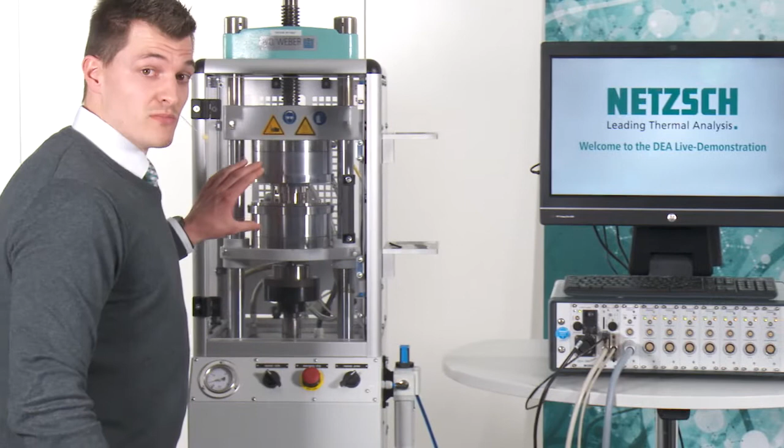This is our NETZSCH DEA 288 dielectric analyzer. Here you can see we have one sensor plugged in channel 1. We use this type of sensor here. It's a tool-mountable sensor. The big advantage of the sensor is that we are not only recording the dielectric signal, so the curing behavior of this material, we also have a thermocouple integrated inside, so we can also follow the exothermal heat of this material during cure. This sensor is integrated into the mold of this DEA lab press you can see here inside.

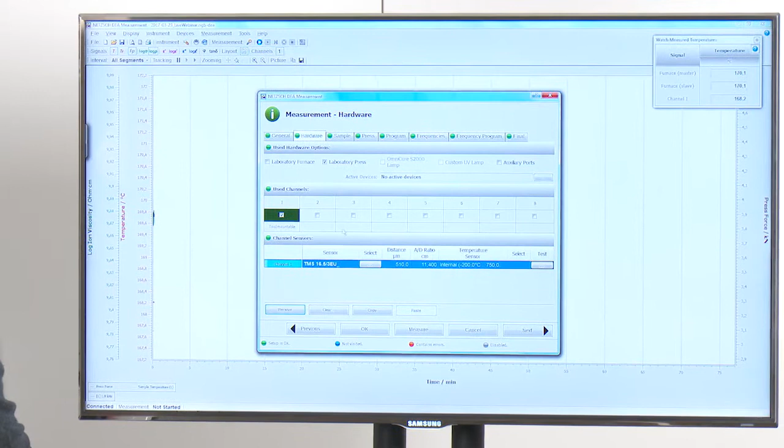So we're ready to start. I will show you how easy it is to use the NETZSCH Proteus software to start a dielectric measurement, and then we'll have a look at the curing behavior of this material. So you have just to put in a few things for sample preparation. Here we have to use our DEA lab press. We have to put on the DEA lab press as a hardware device, and we use the tool-mountable sensor with the integrated thermocouple inside. Maybe, Alex, if I come in, I can also show you that here, this is TMS. This is where you decide in the software.

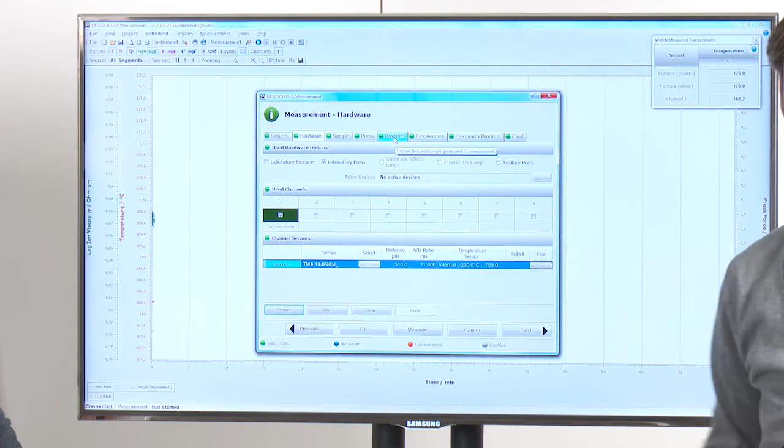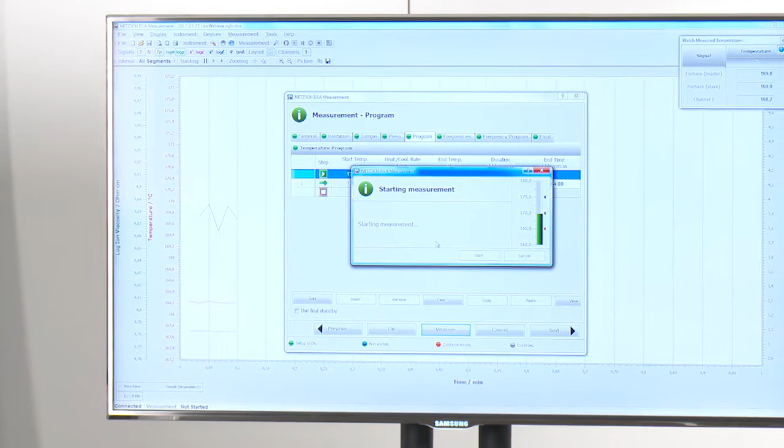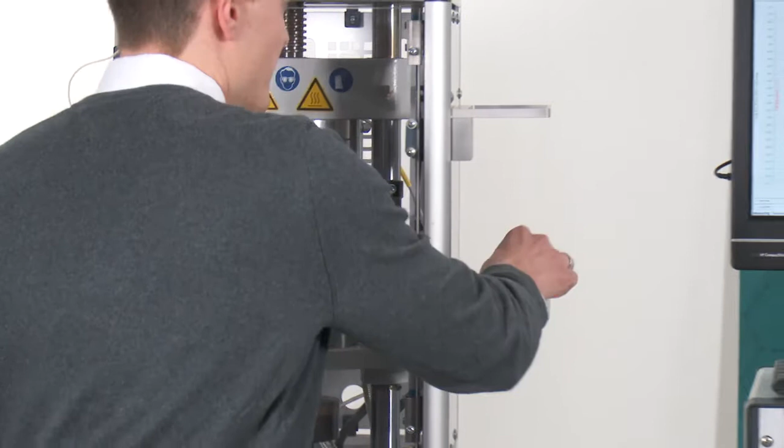Yeah. As a temperature profile, we do an isothermal cure at 170 degrees Celsius for about 4 minutes to follow the curing behavior of this material. So now we are ready to start. I will start the measurement, then we will see how I put the sample into the mold of the press, and we will follow the signal of this material. So now I'm using this carbon fiber prepreg material. Open the door, put the material into the mold, close the door, and we will have a look at what is happening now. Okay, we see that something is happening already.

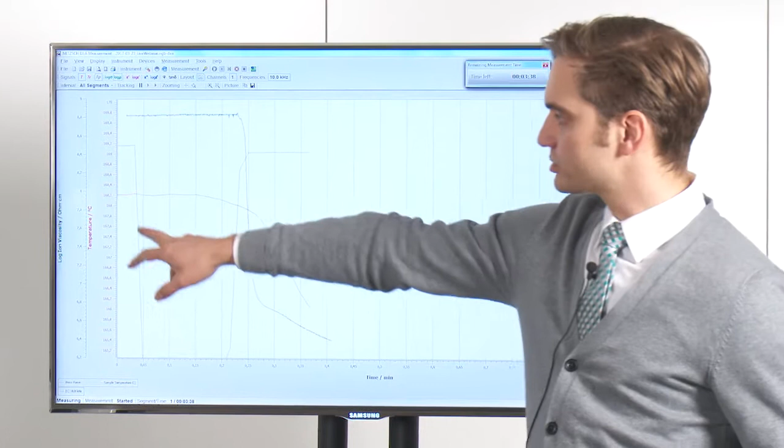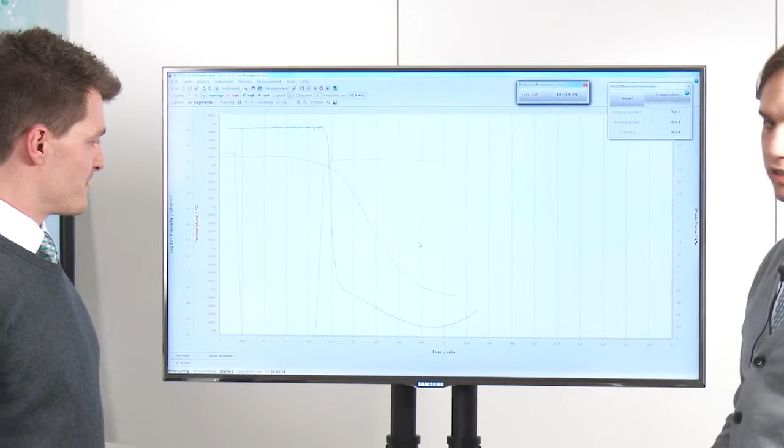We have a look at this green signal here. Well, you see the green curve. This is nothing else but the dielectric signal. Also, we see a red curve here that is tracing the temperature as it occurs. Yeah. Alex, just tell us what is happening with the DEA here. What can the DEA show us? What you can see here is a very sharp decrease in ion viscosity. This indicates that the sample has just arrived at the sensor surface.

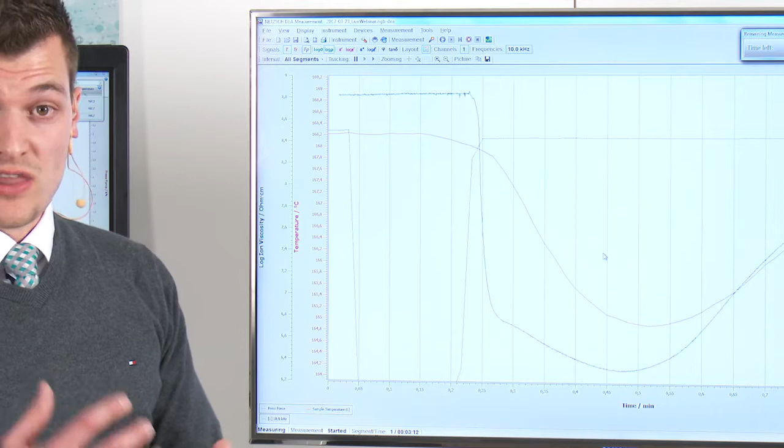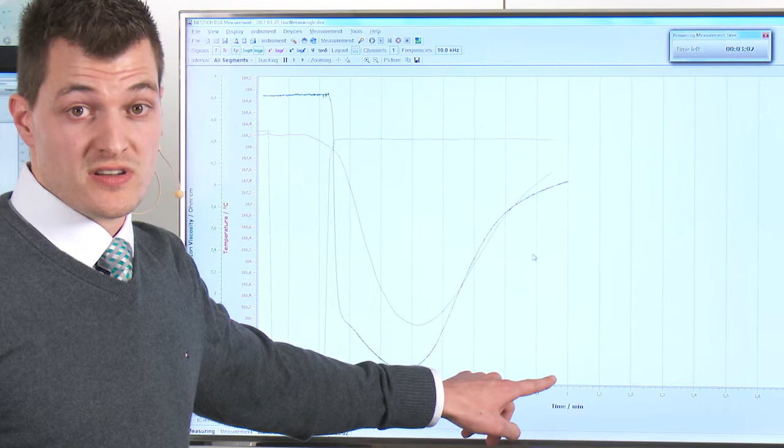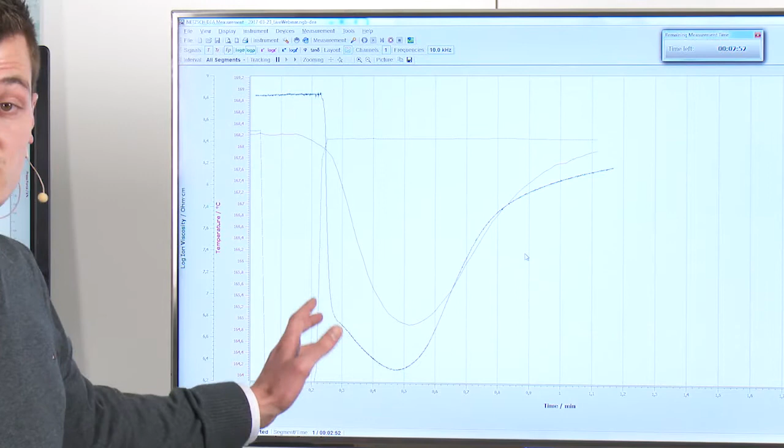Then you can see a very sharp decrease that indicates that the material is getting lower viscous. So here you can see a minimum. This is the point where you've reached the lowest ion viscosity, which correlates to the state of lowest viscosity you know from rheology results. Now you can see that the ion viscosity is increasing and increasing. The slope of this increasing ion viscosity gives us information about the reactivity of this material. So the slope is directly correlating to the reactivity, so the speed of cure at each point we measure here.

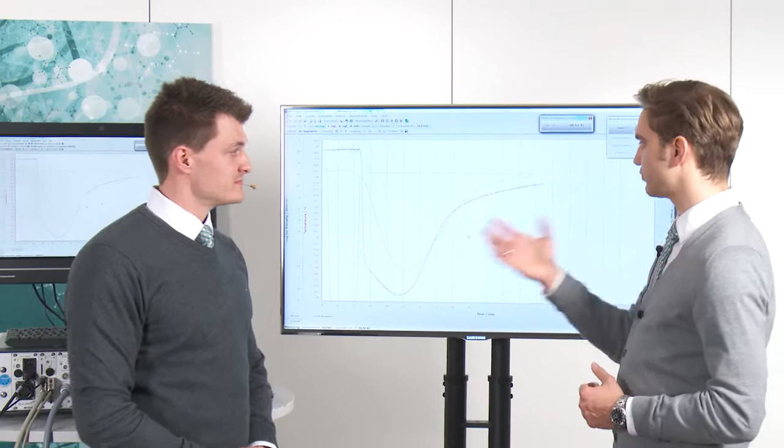Okay, so we can just follow the curing as it goes along, but Alex, I have some more questions for you because maybe this went a little bit quick for the viewers.

That just—you just have some black disk and put it in the machine, and that went really fast. So first question is, how did you prepare the sample? Because normally I would think this is just a one-layer prepreg. So how did you? Yeah, we used 24 layers of this unidirectional carbon fiber prepreg from SGL. Okay, so that's quite a representative sample, I would say, for coupon testing, as you would do in the lab.

Second question, relating to carbon fibers. This is a conductive material, and actually it's not easily possible to measure a dielectric signal to follow the curing of carbon fiber parts. How did you do that? Yes, for sure. You're totally right. We have to put in a separating material. So we used glass fiber woven fabric between the dielectric.

Yeah, you can see that also here. You can see a glass fiber woven fabric between the dielectric electrodes and the carbon fiber material here. So the resin can feed through and the carbon fiber doesn't. Camera can zoom in a little bit. Yeah, you see this is quite convenient. You just put it onto the sample and that's how it goes along.

Next question, we still have some time. If we have a look at the instrument here, maybe Alex. So we're just using one channel here. For the coupon testing in the Netzsch lab press, that's very fine. But my question would be, why would you need these 7 additional channels? What is the use of that?

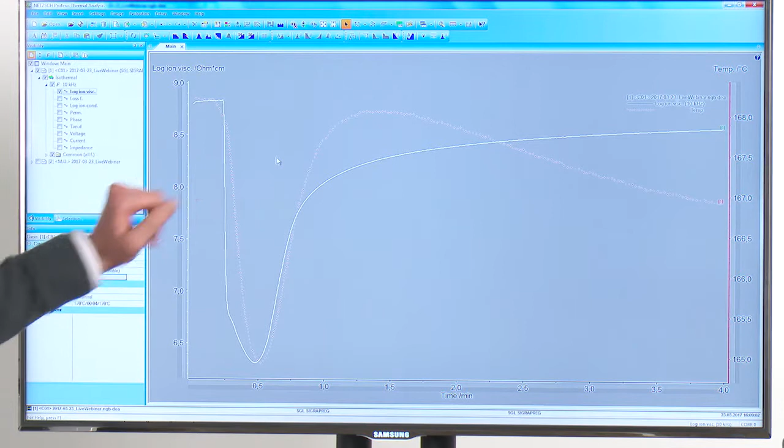So let's go back. Oh, you saw the measurement just finished. What will happen next? Yeah, you could see that the software automatically shifts to the Proteus analysis part. So here we can see the just recorded measurement. We will only have a look at the ion viscosity, the green curve you can see here. As you could see, I started the measurement before I put the sample into the mold. So what we will do now is shift the signal to the point where the measurement really starts, where the sample got into contact with the sensor. This point of the very sharp decrease is now our point of zero time.

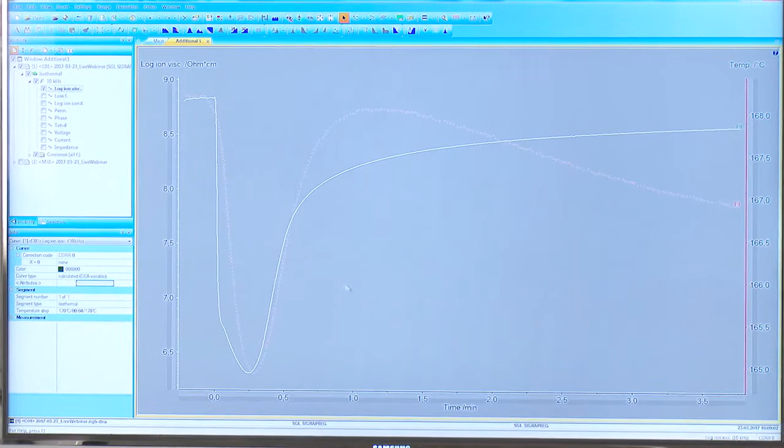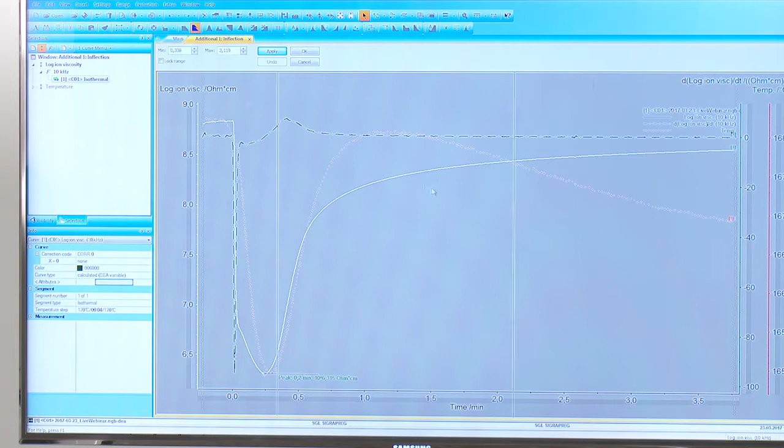Now we will have a look at the most interesting points of this measurement. The first very interesting point is the minimum in viscosity, because this is the point where processing is much easier than, for example, in a pre-cured state. So it's a very low viscous material at this point. And the second point we can evaluate is the point of inflection in ion viscosity. You can see it here as a peak in the derivative of the ion viscosity. So I will change the time unit to seconds.

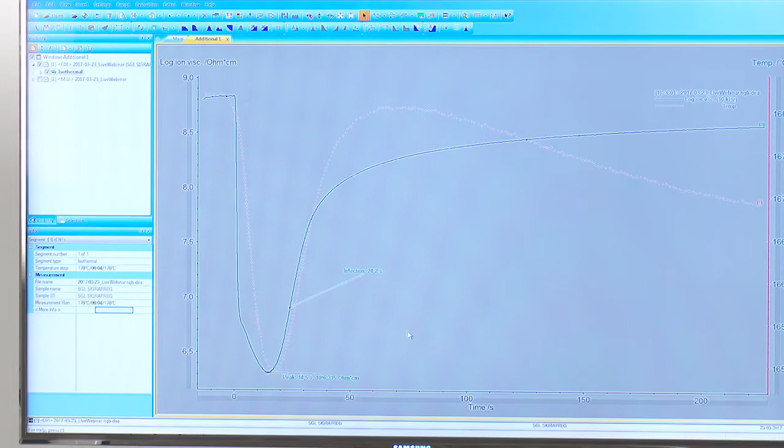The point of inflection gives us the information about reaching the gel point of this material. This point correlates very well to the gel point you know from rheology measurements as a crossover between storage and loss modulus. So those were 2 points that we analyzed right now. The third point of interest would be when is the part fully cured? That is something you could follow if you trace this curve more and more. Once you reach a horizontal state, then I would say you're in the cured state. So with that, you saw that was quite easy.

We also presented you how easy it was to apply the software. So I think this is also a point that is important if you employ such a technique. You do not have to be a pro in dielectric analysis, but you have to be a pro in your processing. We take care of the software and of the analysis.

We could learn that you get a sensor for the sample arrival. You get a sensor for the part that correlates to the lowest viscosity. You get a sensor for the reactivity of the slope here. And you get a sensor for the inflection point, or the gel point, and still you can trace the entire curve of the curing as it goes along inside your mold.

So we wanted to show you two things. The first one was how this can make your process safer, because that is an issue, especially in aerospace, for example, because we can tell you what is happening inside your process all the time, as we have a curing sensor that is placed inside the mold.

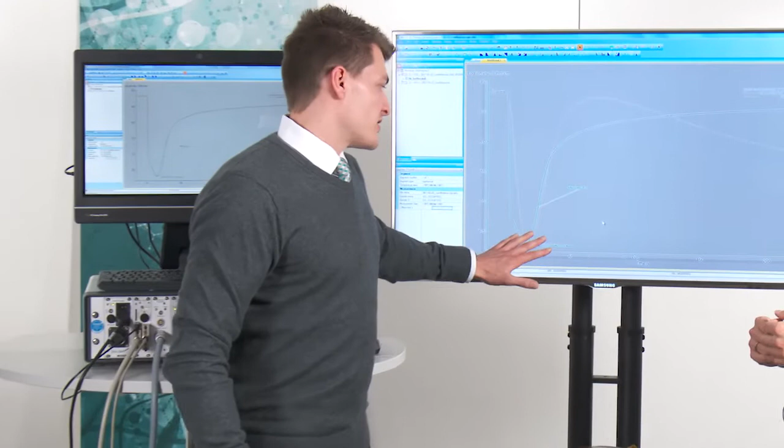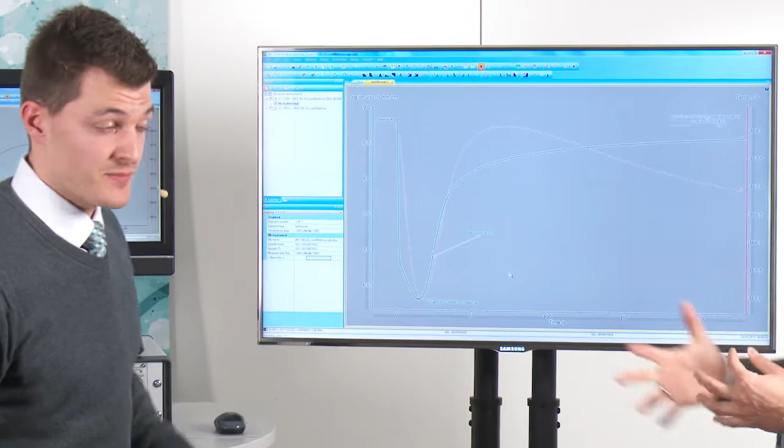Some more questions that we got from the audience. First one would be how to measure the curing rate of the curve. Yeah, here's a question from Finland. If you have a look at the increase of the ion viscosity, the slope of this ion viscosity gives you direct information about the rate of cure, so the cure speed at the point you're interested in. Okay, so if you look at the first derivative, for example, this is your curing rate.

Secondly, concerning the frequency, you selected one frequency, but generally dielectric measurements are multi-frequency measurements. How can I know about the frequency? Yeah, the higher the frequency, the lower is the response we get from the sample. So, for example, here we can see a very good dielectric signal of the sample. But if we reach a horizontal line here at the end of the cure for this 10 kilohertz curve, then we cannot follow the curing process anymore with this frequency.

So then we can switch to smaller frequencies, for example, 100 hertz, 1 hertz, or 100 millihertz, and then we can follow the post-curing process of this material. Okay, well, this was an epoxy, and 10 kilohertz is an appropriate frequency, you would say.

Okay, I look again at our screen here. We have some more. One was answered already. What is the matrix material used here? That's an epoxy resin. Yeah. It's an SGL epoxy. Next question.

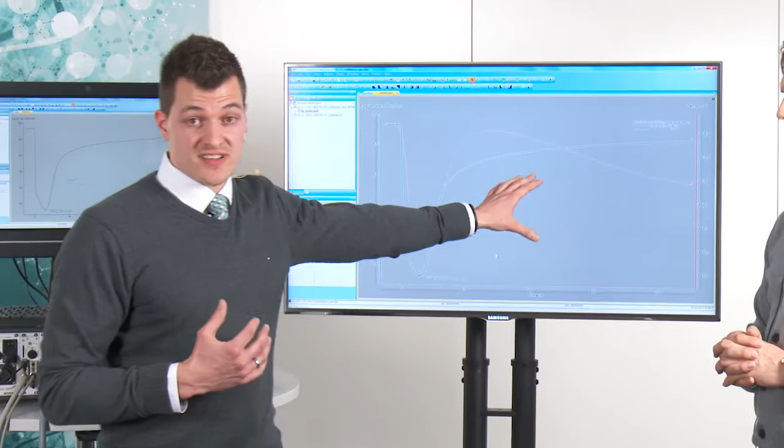What can the DEA tell us about the degree of cure of epoxies? Can it help to identify a suitable post-cure schedule? Can you say something about that? Yeah, the question goes in the same direction we had with the different frequencies now. So you can use one frequency to follow the curing process. So if we have a look at this frequency we used here, 10 kilohertz, and for example the DSC measurement of this material, we cannot follow the heat enthalpy of the DSC after 2 minutes at this temperature of 170 degrees. But DEA can with the 10 kilohertz curve.

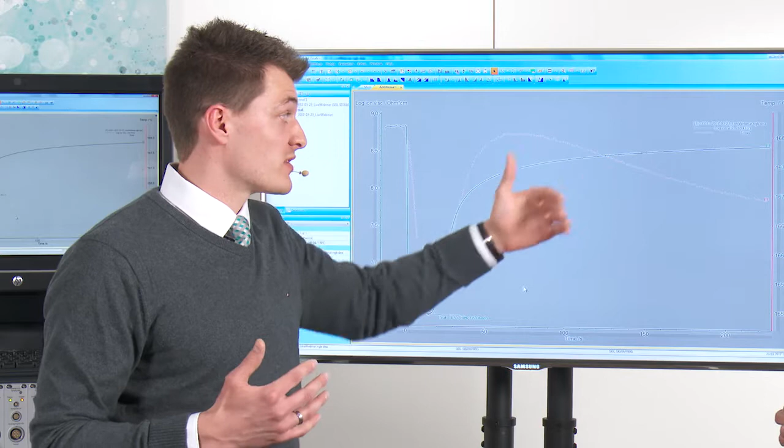But also, if we cannot see any change in the 10 kilohertz curve when, for example, we reached a curing state of perhaps 95%, we can use lower frequencies to follow the post-curing process. And then we can adjust the post-curing process to see when the material is really fully cured. Okay, so I can correlate the frequency response at different times to the state of cure. So I think we can answer the question with yes.

I can use the DEA as it is the only technique that can just stay with the process all the time, and this kind of sensor gives you a possibility that no other technique actually offers. And especially, it's really hard, I think, to place a DSC inside the mold. So that's what you can do with the DEA. Yeah, and like all thermophysical behavior, the dielectric also follows the time-temperature superposition principle.